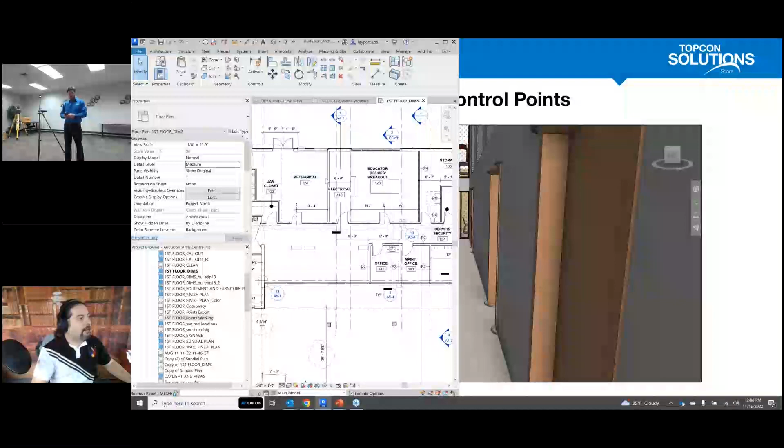Step one, really, it's about setting up your control points, okay? So this process typically happens once you've already laid out your file in Revit. Let's take a look at the Revit file here - you can see we've got a dimensional drawing showing our building itself.

Just to give you a little bit of context, if you've ever seen any presentations I've provided, you may have seen me use this before. This is called the Audubon data set that I typically use for demonstration purposes. This is a real world building, the Grange Insurance Center, the Audubon building outside of Columbus, Ohio. If we have time at the end, I'll show you some of the building itself and compare it to the models - there's some pretty cool photographs we can get out of this real world building.

How do we lay this out in the building? So let's say we've got this floor plan, we want to start laying things out.

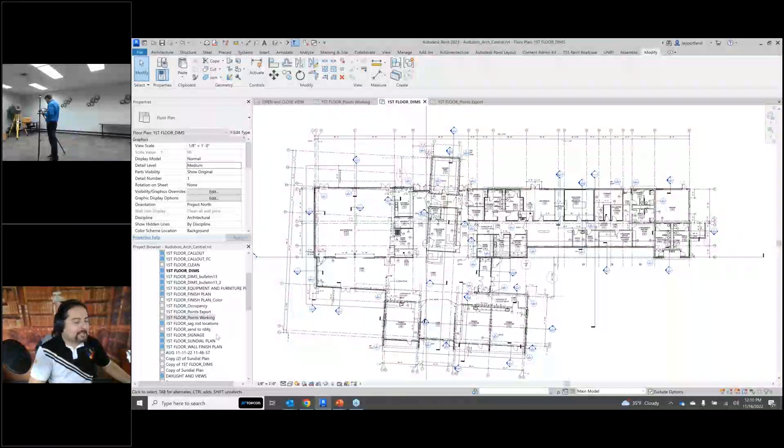So I've made a couple of additional views here. I've called them, and you're going to see those over here in my left panel. I've got one for points that are working and one for exporting.

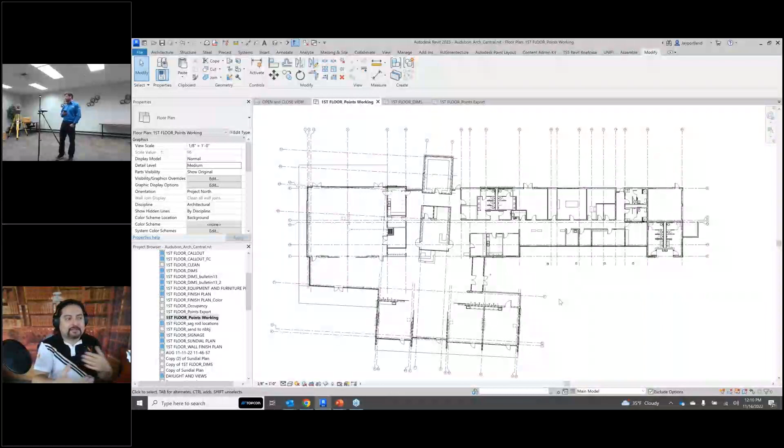So I'm going to go into my points working file, and I'm going to start with something that Mr. Chris Wilson over there can find. We have a couple of points where Chris knows he can go find those, and those are important points. Those are called control points. He can find those in the field, and he can easily go set up a robot and start to make those points. Those points happen to be the grid line intersection, 16 and 16 and a half.

They happen to be 8.5 feet apart, along with grid line D, D as in dog. So those two control points are right here, and I'm going to circle them, those intersections of where these grids intersect. So how does this work?

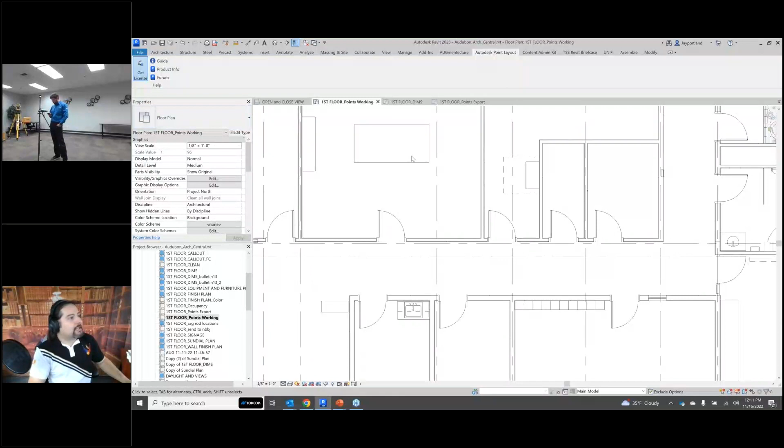With Revit, whether you're using Revit 2019, 2020, 2021, 2022, or 2023, doesn't matter, we've got Autodesk Point Layout. If you launch it for the first time, you're going to have to check out the license. So under Autodesk Point Layout, you'll simply get the license and it'll initiate the full ribbon. Typically we start from left and move on to the right, all the way over to export.

So if I'm trying to get points out to Chris, this is how we'll do it. I'm going to start by marking these two points, 16 and 16 and a half, where it intersects with column line D. How do we do that? Let's go to Point Layout, and here we have control points. I'm going to start by typing in a prefix, control point, CTRL. And I'm going to start with my point number.

Now, Chris and I are used to going back and forth with this. So anytime I'm on the first floor of a building, I start with point number 10,000. That's the point number itself. If I'm on the second floor, I start with point number 20,000. Third floor, 30,000, so on and so forth. So he knows that if he's seeing a point, 10,000, that's the first floor of the building.

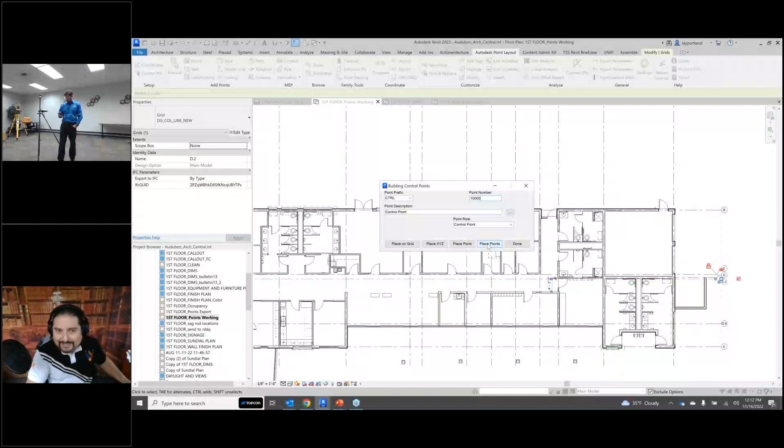A couple things to note: the point description and the point role is a control point. Now let's go, rather than placing a point singular, I'm going to place points plural. This will allow me to select those 2 points, 16 and 16 and a half. Okay, there are my points.

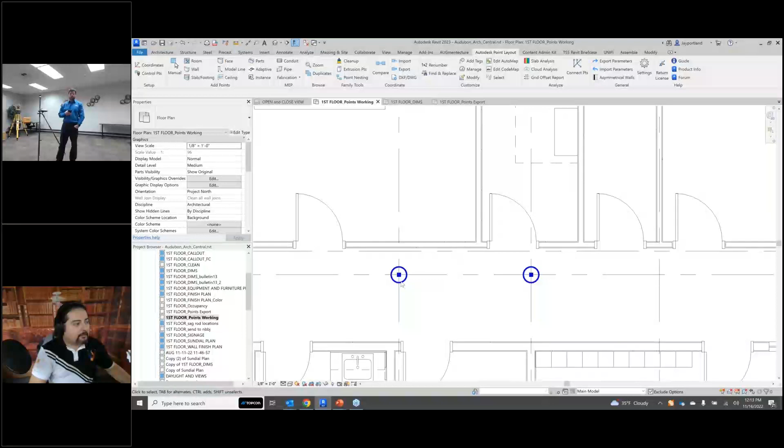Now I've modified the point itself, because the point is a 1-inch cube, 1 inch by 1 inch by 1 inch. That's how big it is. I've modified it so that I can see it in my floor plans. These blue control points, that's what they are, blue control points here, they allow me to establish where Chris is going to go work and base the rest of the points off of.

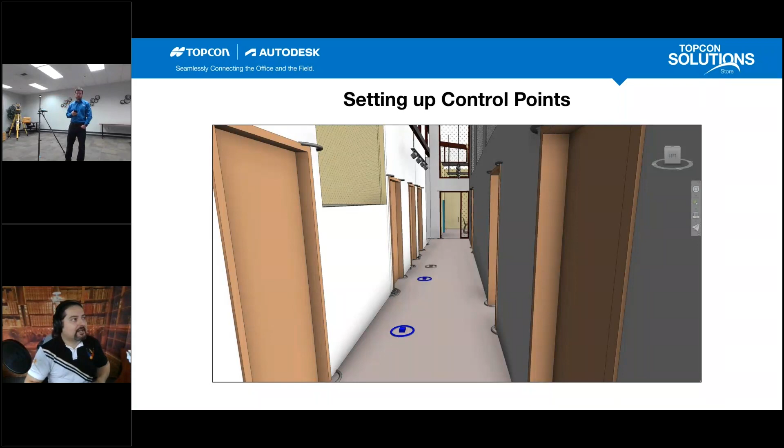Okay, so now that you've seen the control points in blue, the next thing you're going to see is how do we automate the point creation in red. What you're seeing there, we've already laid out the blue control points. We're about to automate those red points.

Now, rather than picking points manually, I'm going to show you a tool that automates that process. This is standard functionality of Autodesk Point Layout. This is the wall family points. So what we do is we tell it what point type, this is a wall, what the prefix is, WL, and I'm going to start again with point number 10,000.

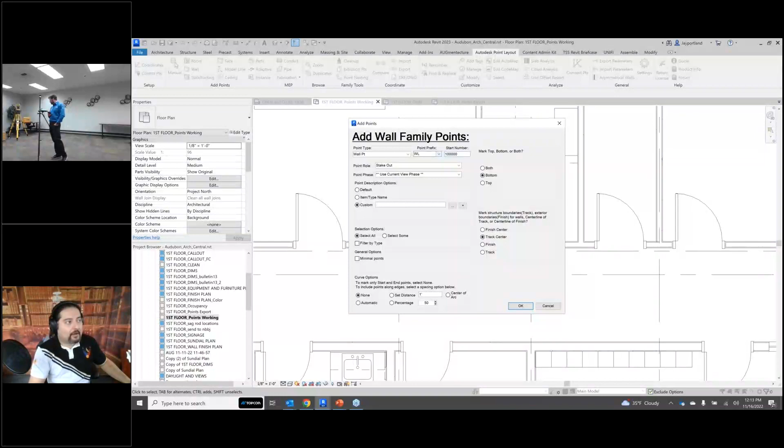So you might be thinking, Jay, you just used point number 10,000. Yeah, but it has a prefix. The other one had CTRL 10,000. These are wall points, WL 10,000.

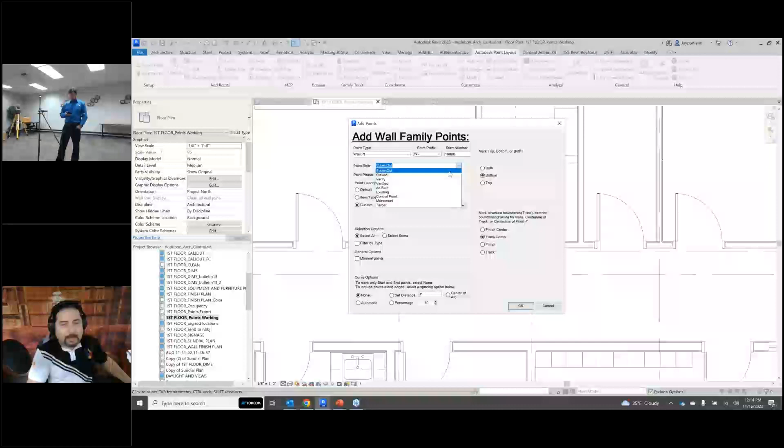Okay, so next, what do we want to do? So we want the point role to stake these out. We have all these options at our disposal, I'm just going to choose stake out. Next, what we want to do is add a custom description to this, and I'm just going to put wall points as the description. This is a code that will be transferred over to what he's going to see in the field. Chris is going to see wall points as the code.

Okay, next, we're going to select all of them as opposed to select some. Think of select some as being able to go select a window. I wish it said select within a window, but it says select some.

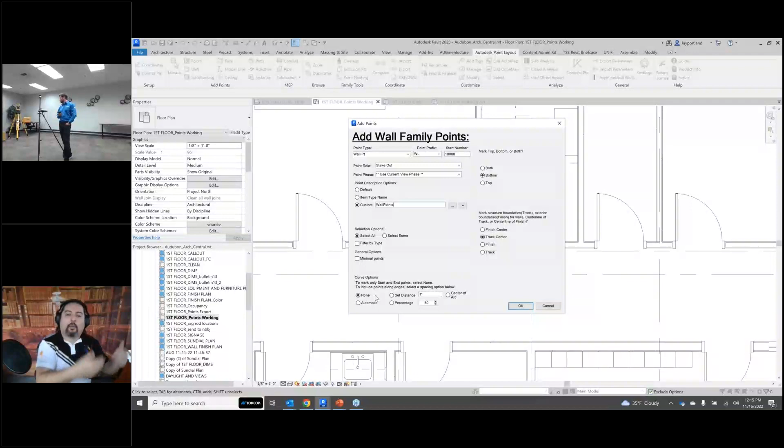I'm going to select all. Next, if I had a curved wall, let's say it was a gentle curved wall, maybe I want a point at every 12 inches along that curvature of the center line, right? So this is where we can say, I just want the ends, or I want to lay points along that curvature. If I hit none, by default it's going to do the start and the ends only, okay?

Now, what do I want to mark? Do I want to mark the top? Do I want to mark the bottom? Or do I want to mark both? Really, I just want the bottom. I don't really care about the top. And then what part of the structure do I want to mark? For this, I want the track center. Remember, with metal stud framework, the track is where we're going to lay the bottom piece where the studs will connect into. Okay, so I want to do the track center.

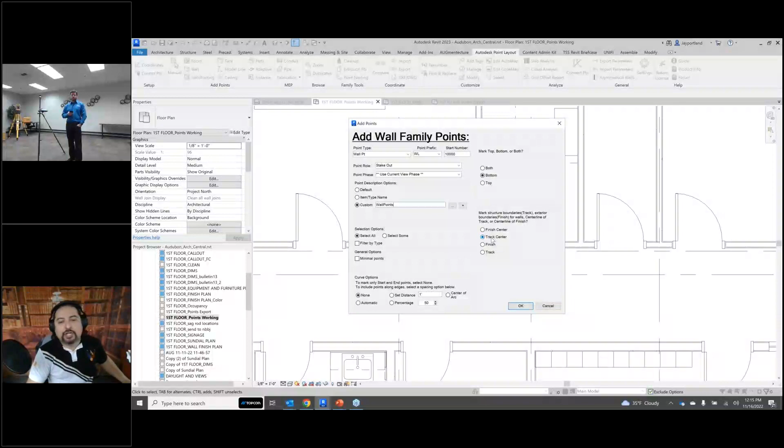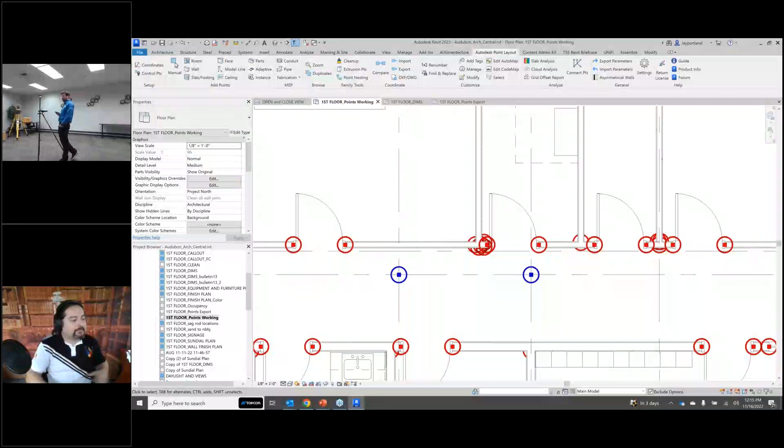And just like that, it's going to take about 20 seconds because this is a rather large file. There are a lot of walls within here. It's going to analyze all of the walls, all of their endpoints, and place a point at each individual endpoint. Doesn't normally take too long, and as you can see here, it took about 15-20 seconds to lay out all of these points. If I zoom out, I can see all of the points that have been laid out already for me. Now I'm zooming back into where our control points are.

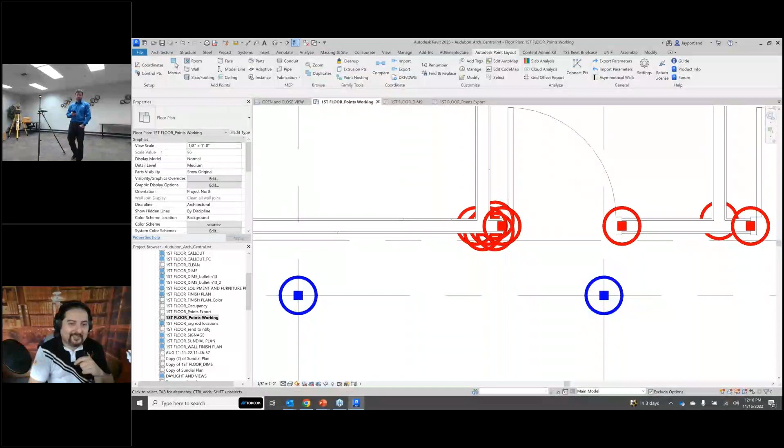Although the tool is very smart and it can take care of all of that, sometimes you get what's known as a point cluster. Chris, was that right? Was it a point cluster that we see? Yeah. So this point cluster, this isn't exactly what we need. So we're going to clean this up. And it's literally as simple as selecting and deleting the unnecessary points. Select that point and delete it. Select the next point and delete it.

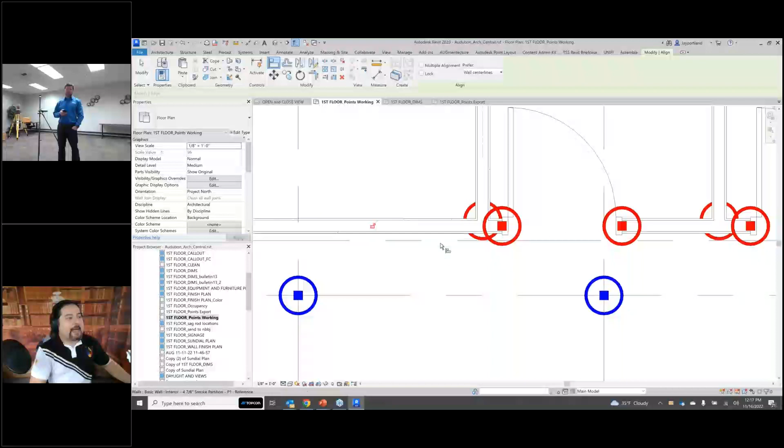Now this point right here, I want that point to be aligned. So I'm just going to use my standard Revit functions that you guys are already familiar with. I'm going to align it not to the outside face of the gypsum, but to the outside face of the structure where the gypsum mounts to, right? So I'm going to grab that and I'm going to grab that point. So there we've aligned these points, and across the hall we can see additional points over here. And we're going to see how Chris goes about laying this stuff out. So guys, it literally is that simple to automate the wall point layout.

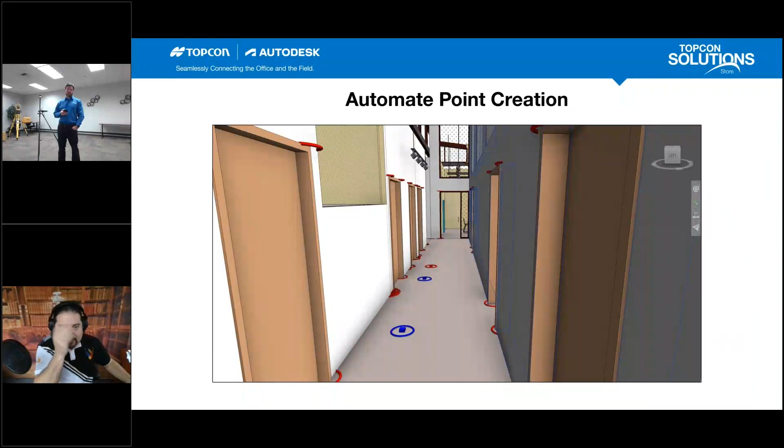All right, let's transition back really quick to our PowerPoint. Automating the point creation, which you just saw. Now let's take a look at exporting these points out to the field. It's a very simple process. And as I mentioned before, I'm going really fast here, guys, but when you work with Autodesk Point Layout, you start from the left in the ribbon and you move yourself over to the right.

Now you saw wall points. We can also do face points, model lines. We can do parts. We can do conduits. We can do pipes. We can do fabrication pipes, parts, hangers. We can do all of that stuff. And then eventually we can export. We want to move to the right. We want to export this information out so that Chris can see it. How do we do this? So simple, export the points.

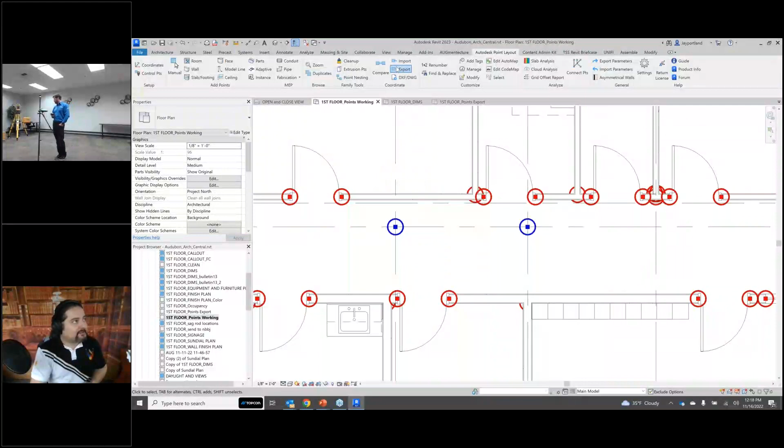We want to start in the upper left-hand corner in this point export order box. Typically, the point export that we want is northing and easting, and that's really user-friendly for people who are in the surveying and layout industry, right? So we can use the northing and easting or the easting and northing. So this is YXZ. Something that we on the Revit side are more familiar with is XYZ. So we're going to use northing and easting. We're going to use decimal feet as the default units.

We will in fact export a DWG out of Revit. This is for the Robotic Total Station. And we're going to check for duplicate numbers, okay? So the point selection, we're going to select all of the points that we just created. The coordinate system, we're just going to use the project, the relative project internal. It's just important that you make sure that every time you export and every time you import, they're the same, okay? And then what is the file export name? So I'm going to call this Audubon SEARUG.

Oh, there we go. There we go. Got it. Okay, Audubon SEARUG. I'm going to place it in my folder, in my dataset folder, and we're also simultaneously making a DWG file and we're making a CSV file, okay? We're doing both in the same thing here. So here's the DWG and here's the CSV, okay?

The CSV is just gonna be a literal data dump of the point number, the description, the X, Y, Z information, okay? Let's go ahead and export this out. It analyzed for duplicate point numbers. There weren't any, so I get that confirmation. I'll hit OK. It made 557 points just off of the automation points and those two control points that I laid out. Let's hit OK here.

Next, it's asking me which view for the floor plan, which view do you want to use? And I have two that are ready to roll. I've got one called points working, which is the view that I'm looking at. And then I have one that's called points exports. It just doesn't display the ring and the cube. So I'm going to use the point exports, and then I want a DWG resulting file here. What coordinate system for the DWG? I'm just going to use the project coordinates.

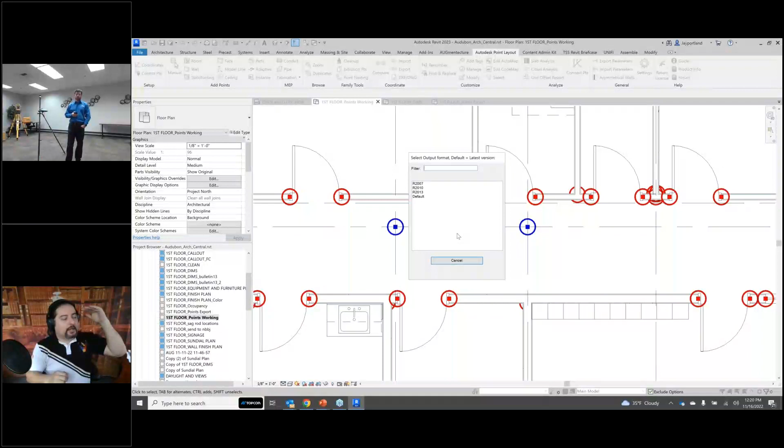And then this is what version of AutoCAD you want to use. You can use version 2007, you can use 2010, 2013, and if you use default, it's just going to use the default version of what I'm currently using. I happen to be using Revit 2023 right now. Okay, so just like that, we have now exported those files. They have been created. And now that you've seen how we export those points, what's our next step here?

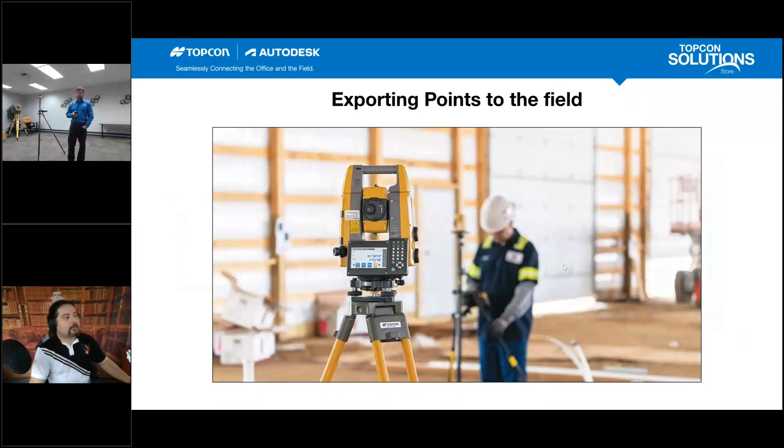Our next step then is to ensure that we get this out to the rest of our system, and we're using Magnet Enterprise. And here to tell you more about Magnet Enterprise is Mr. Chris Wilson. Thanks, Jay. Yeah, Magnet Enterprise is an online web-based application for transferring files from the field to the office. It integrates seamlessly into Magnet Field software and the data collectors.

And it's a great way to get a visual map of your projects that are geo-referenced. You can transfer real-time data. You can also see equipment that is being used in the field live while it's being used in the field. And as of right now, there's currently no file upload limit on it. There's lots of other features and cool things about this web-based application, but those are kind of some of the high points. Thank you, Chris. Excellent.

Good. So I have to put my file somewhere where Chris can reach it, seeing as how he's in Kent. And because this is a live demonstration, let's go ahead and do that now. I'm going to pop open my Magnet Enterprise. It's simple. I'm using Google Chrome. I went to the website and I've signed in. From here, I can see all of my different projects that I have access to. And the project I'm working on right now with Chris is this Audubon project.

I want to place it in the inbox folder here that you can see. I don't have any files in there at the moment, but I'm about to upload those particular files from my desktop here. And I called it the Audubon SEARUG CSV and Audubon SEARUG DWG. Let's go ahead and open those up and upload those files.

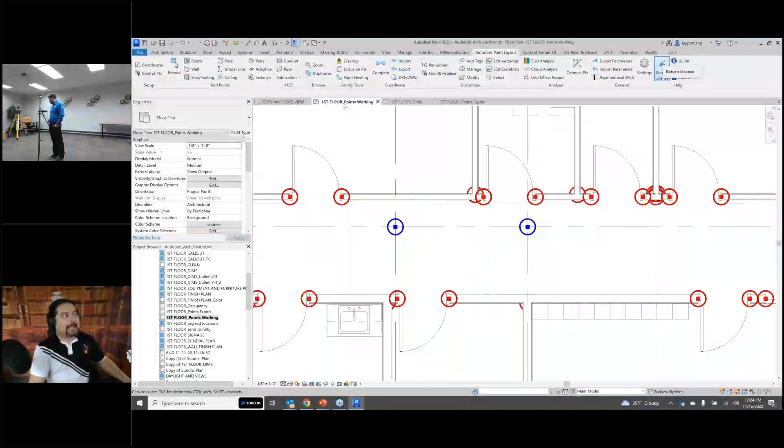In Revit, I have to be signed in as my user account, and when I hit checkout license, it's going to check to see if my account has an APL license. I will double check that for you, and we'll get a clear answer on that. Thank you, Evan.

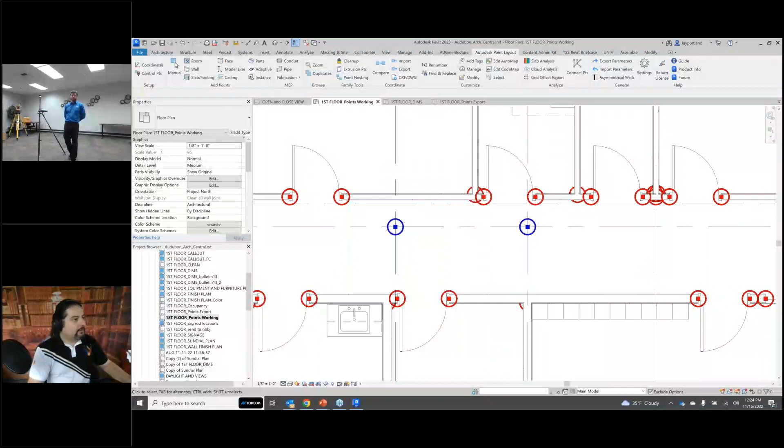Okay, all right. Let me switch back to Enterprise. We have those files uploaded. Excellent. Okay. So that's Magnet Enterprise, guys. That's what we do with Magnet Enterprise. The next thing that you're about to see, and we're going to make Mr. Chris Wilson here presenter. And the next thing you're going to see here is laying out those points in the field. Stand by while we make Chris presenter.

Okay, let's find Chris. There it is, Chris panelist. Okay, let's make him a presenter. Okay, Chris, can you confirm that we can see your screen here in a moment? Yeah, looks good. Should be able to. So hopefully you should see Magnet Field show up. Yes, good, we do. Take it away, Chris. Okay, great.

This is a CSV file with the points. And it's going to ask me, do I want to go ahead and put that right in my job? I'm going to say yes, I do. And I'm giving it a data type. Of course, we want to choose points. And then, sorry, I got a lot of windows. Here we go. And then the format, Topcon text custom, text file or CSV.

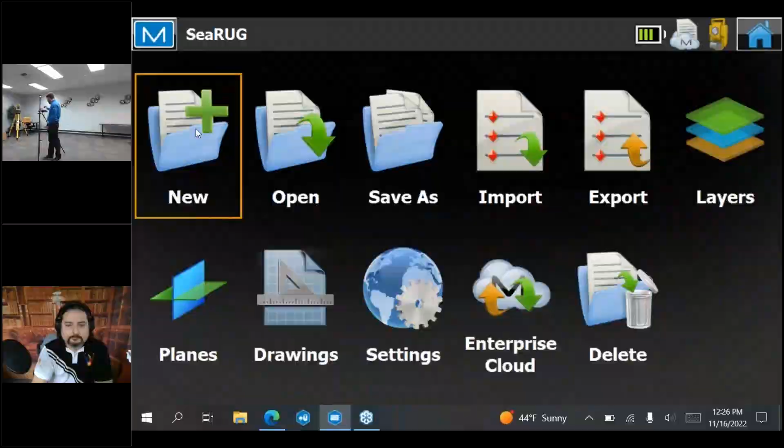This gives you more options of what kind of file you want to bring in and different changes you might want to make so that it reads properly, but we've tested this before, so we know all our settings are good. So it gives you a confirmation 558 points have been imported. Great. I'm going to go back into Enterprise one more time to get that DWG drawing. There it is. And same thing. I'm going to go ahead and download that, bring it right in my job. Multiple. That all looks good. Let's go. And it's loaded.

And one nice thing, I'll stop on this page just to make a quick point, is something that they added into Magnet Field that works even better with AutoCAD. As some of you might know, there's sometimes a lot of layers with AutoCAD drawings. And in Magnet Field, you have the option to go ahead and select used. So on this particular one, there's at least a couple layers that it was able to turn off because there's just nothing on there. And it's just going to fill your data collector up with more layers that you don't necessarily need. So really nice extra feature they added into Magnet Field that works even better with utilizing AutoCAD drawings.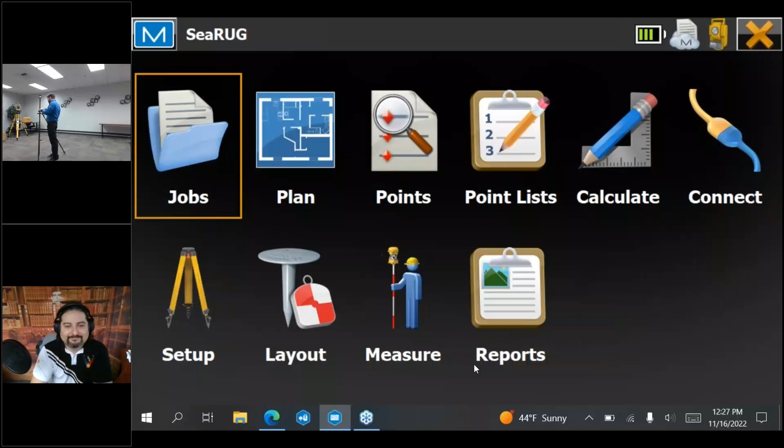All right, so it looks like I have everything in there. And so at this point, I'm already connected to my robotic total station across the room there. And I'm going to go ahead and do a setup routine using those control points that Jay transferred into Magnet Enterprise. So here I'm basically just giving it the parameters for doing the setup. I'm going to tell it to use the first point elevation. I'm using a prism as my measurement file. Now I'm going to tell it which point I want to be able to use for control.

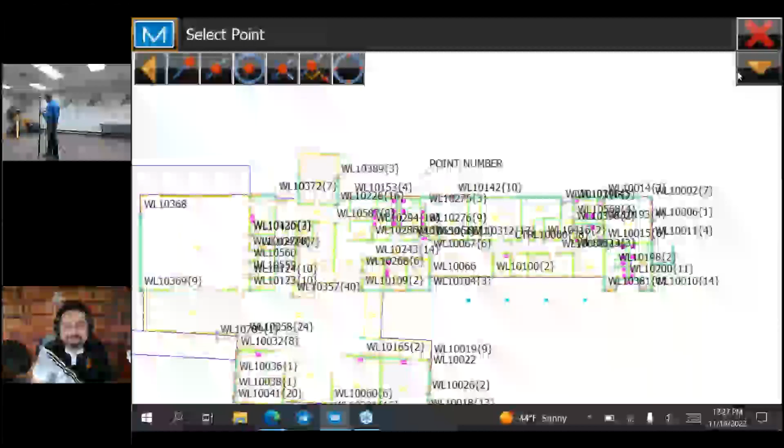I'm going to zoom in a little bit. As you can see, this is the same file, just a little bit different looking when you're in this particular software. Okay, so I've selected my first control point. I'm set up over it already. I have my prism pole here nice and level. I have the offset for my prism pole so that it knows that I'm 5.5 feet from the center of the prism to the tip of the rod and where it's at on the ground. So now I'm going to go ahead and tell the instrument to start tracking this prism. After a brief search.

There we go. All right, so now I'm going to go ahead and take this measurement. Great, now I'm going to go ahead and move to the next one. You'll notice the robot is following me while I'm doing this. Got onto my second control point. I'm going to go ahead and re-level. Select which control point this is.

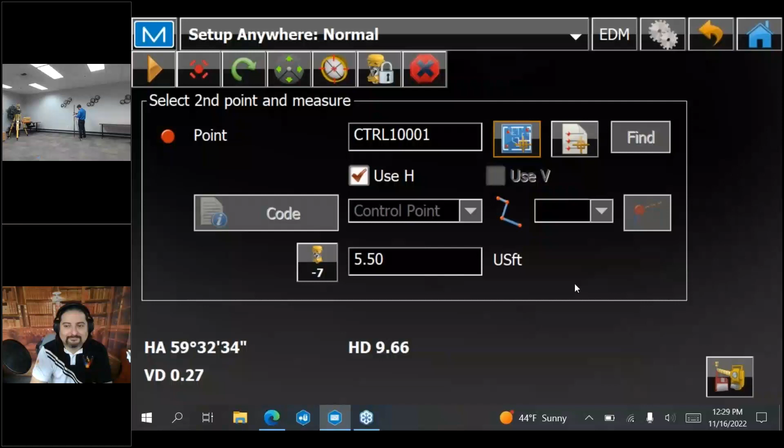I'll take another measurement. Okay, and from here it's going to tell me basically how well the measurements that the instrument was taking fit to the design information I have in the model. So these points and the angles and distances that robot was measuring match up to what's in the model by up to a hundredth. So that's really spot on. That's perfectly good for doing most layout.

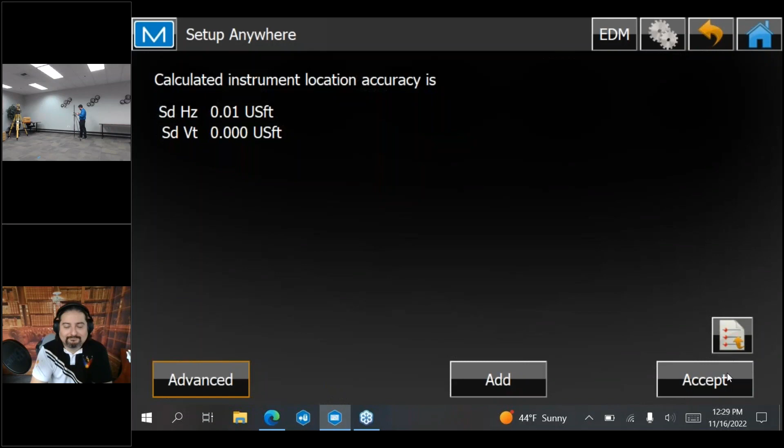I'm going to go ahead and click accept. It's going to bring me back to the home page. I'm going to click on the plan view. And here I can jump right into doing layouts. So some of these layout points that Jay uploaded into Magnet Enterprise. So I'm just going to use this quick select tool here to select some of these wall points. And then I'm going to lay out with a points list.

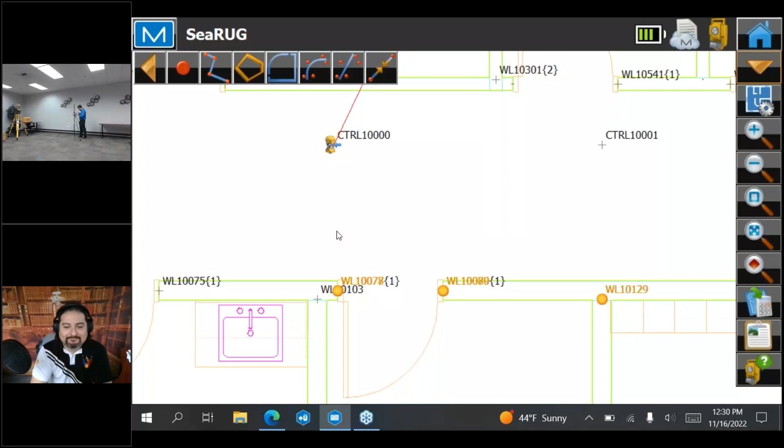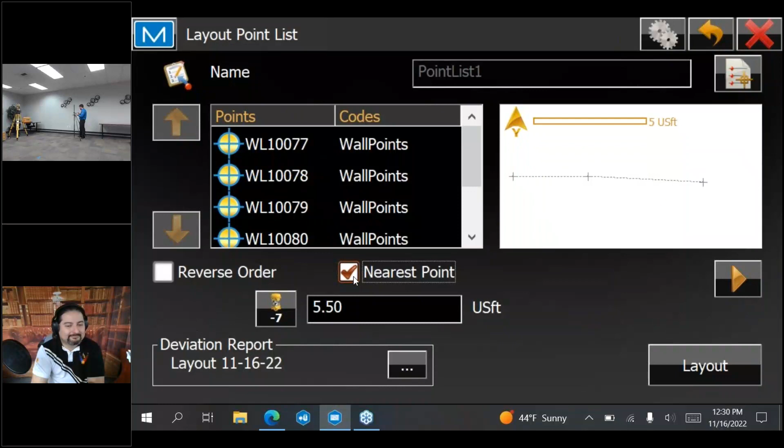Just push and hold on the screen, lay out points list. And I have this really cool option here to select the nearest point. What that is going to do is it's not going to care what the actual number of the point is or what the name of the point is when it's progressing me along while I'm doing layout from point to point. It's just going to tell me this one is closest to you in your points list. Let's lay that one out next. I'm going to go ahead and click on layout.

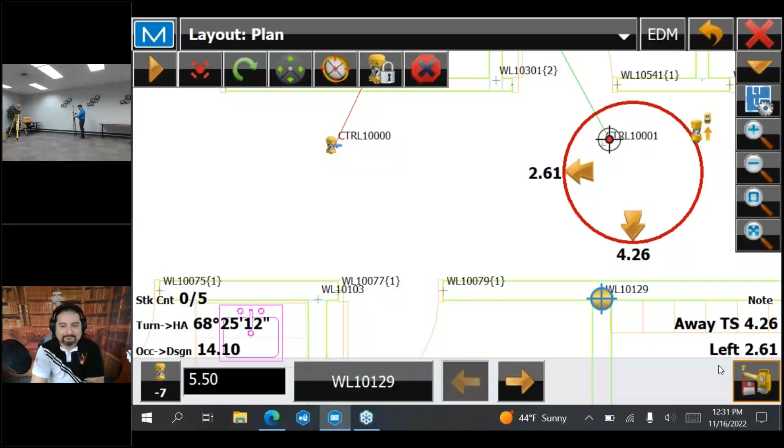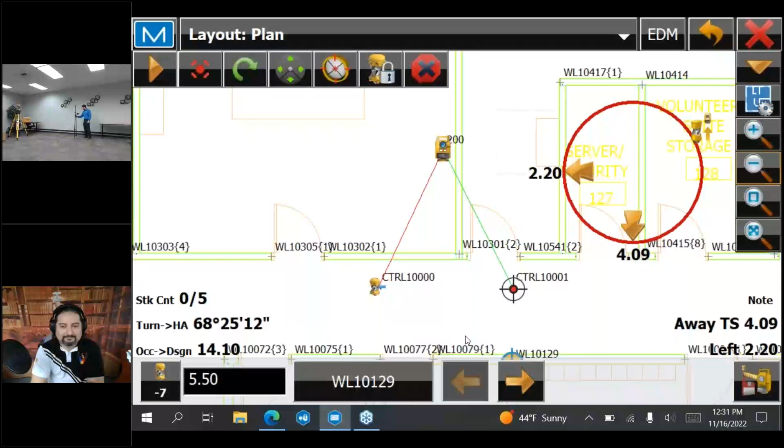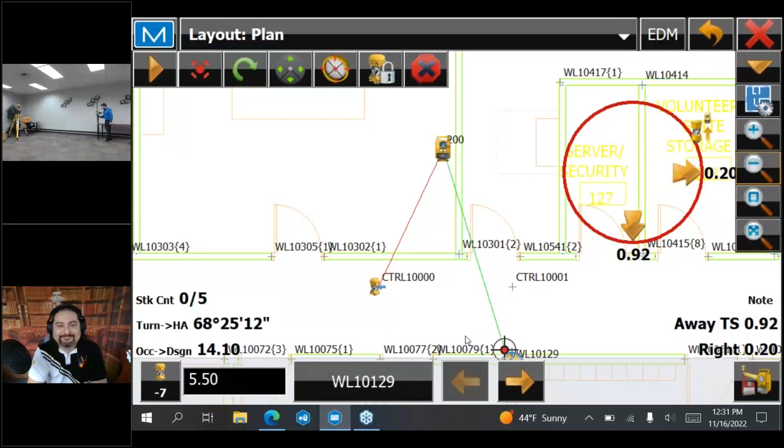And Chris, we're hearing some buzzing and some clicking. Can you help us understand what we're hearing? Oh, yeah. So, for me in a sales position, we like to call that the sound of making money. That's the ultrasonic drive motors of the Robotic Total Station. It makes some very unique sounds, and you grow to love it. It's pretty nice, but it lets you know it's working. Typically on a job site, you have so many other noises that it's not something you even really notice. But that's what that is. It's actually ultrasonic drive motors of the Robotic Total Station.

So in and right. So as I got closer, you might notice on the screen there, it changed my viewpoint, and it brought me in a little bit closer to where the point is, and you can see where I'm at in reference to that point. And it turned green because of the parameters that I currently set. Just kind of helps speed you up. There's a few different things you can do here to do that.

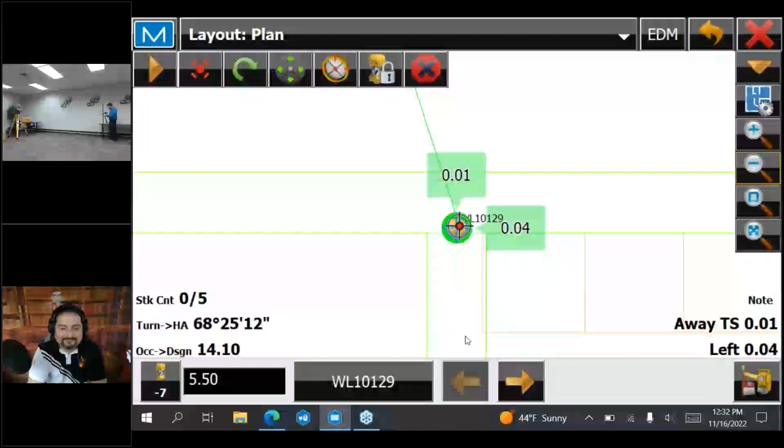So, all right, so it looks like I have to go in and right just a little bit. I'm going to get it just close for the presentation. Perfect. We're in 200ths away from the point. For most things, that's going to be pretty dang good for what we're doing here. So I'm going to go ahead and take this measurement.

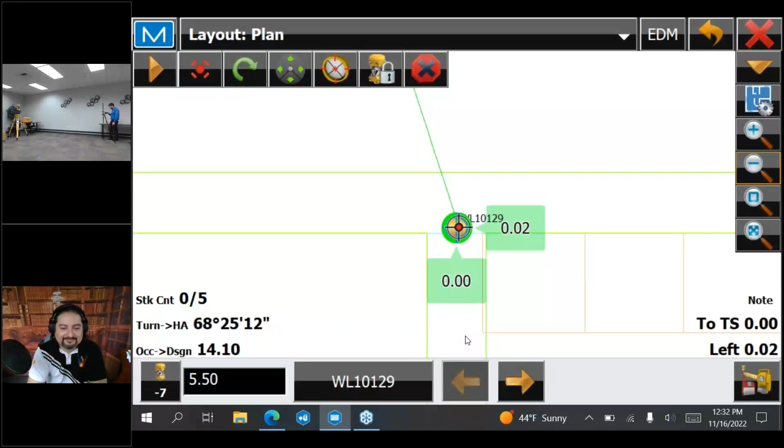And you can see on this screen, it gives you all the parameters of this point that you have currently laid out. It shows you how far off that layout point was. And at the top, I have set an in-tolerance specification, basically. It's just a quick way that you yourself or a manager can look at what layout was done and know right away, is it in your tolerance that you currently set, or is it outside that tolerance?

A couple of other options I'll just go over quickly here. You can attach photos or all kinds of notes to any of the layout points that you do. You can, of course, code it if you'd like, and you can apply it to different layers if you wanted to. So I'm going to go ahead and accept this because I like everything I see. I'm going to hit green check, and it's going to advance me to the next closest point.

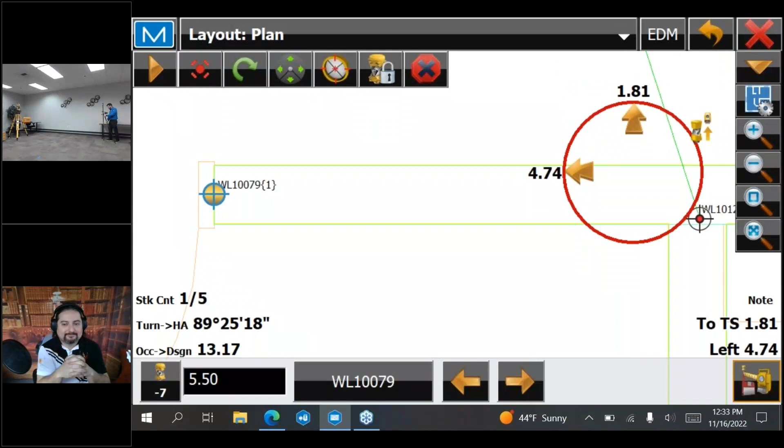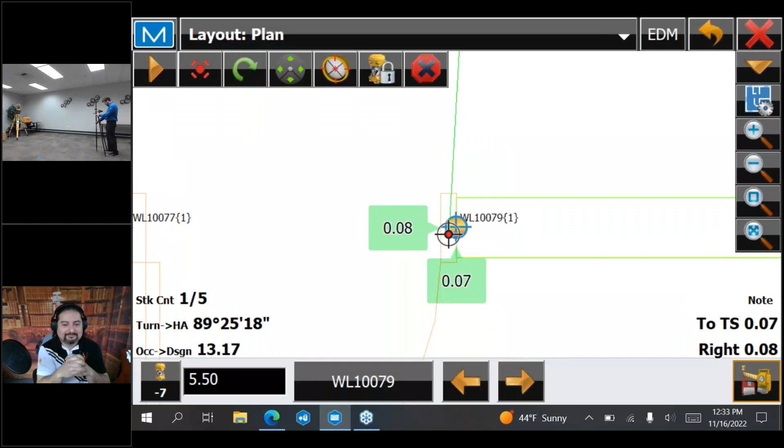I need to go left about 5 feet and up about 1.5 feet. And right there. And so I get close to the point, and then I re-level. About like that. And it looks like I have to go right about 8 hundredths, something like this. So one other thing I'll point out here is, on my screen, you might notice an STK CNT. It's on the left-hand side. It says 1 of 5.

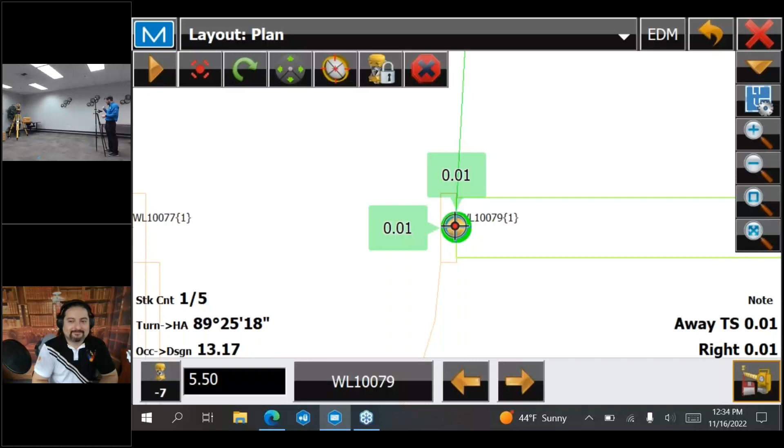That's a nice feature that we have in Magnet Field Layout that basically when you're staking via points list, like what I've done here, it gives you your total points that you need to stake out, so 5. And at this point, we're on number 1. This one I'm about to lay out would actually be number 2. It's a great way to know how much work you have to do and how much you've done so far. So if your boss calls you and says, hey, how much longer do you have? You might have at least a little bit better of a gauge on that with that kind of data.

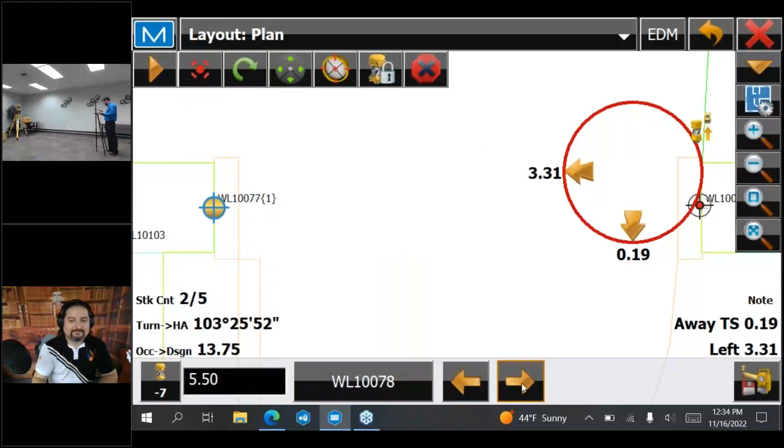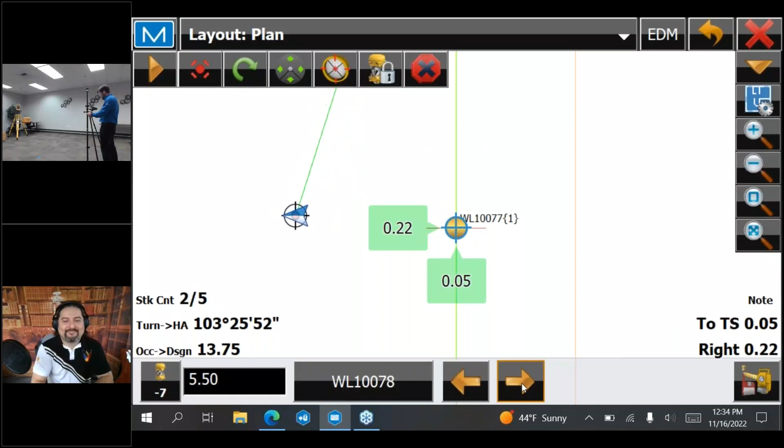So this also looks great. I'm going to go ahead and green check. Going to go to the next point. And here we go. We'll do this last one here. Right, 2, 3. All right. And this one, I'm going to actually go out of tolerance just on purpose, just to show you. So you can see I'm about 2/10, 3/10, something like that off of the point. And basically, I haven't leveled the pole.

So I'm going to go ahead and take this measurement. And it gives you a warning because of the parameters I put into the software. It tells you, warning, basically you haven't laid this point out very well according to your parameters. Do you want to continue storing the point? I'm going to go ahead and click yes. And you can see at the top, in tolerance, no. Just to make it really clear whether something was done to your specifications or not. Just another way to speed you up and also hopefully alleviate any errors. So green check. All right, awesome. And you can see on the left-hand side, my stake count also went up to 3 out of 5.

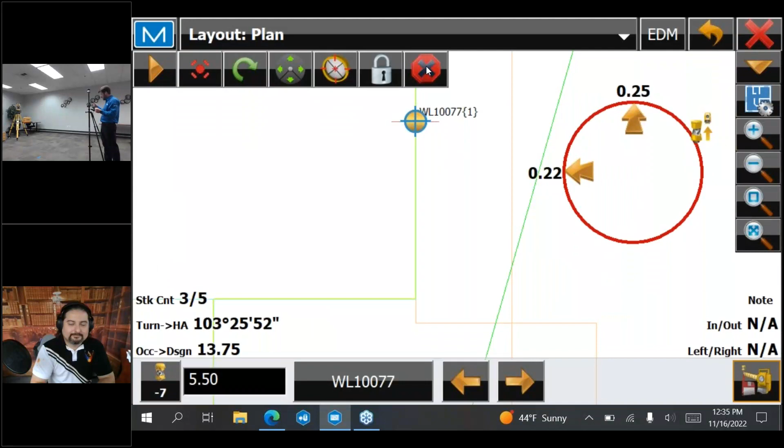From here, I'm going to go ahead and push these points that I laid out back into Enterprise so that Jay in the office can take a look at what I've done. I'm going to go back to the home screen. I'm going to go into jobs in the Enterprise cloud. And from here, I don't have to do anything else other than hit this drop-down menu, upload current job, upload. And looks like it's just about done.

And one great thing is that I just uploaded the complete job. I didn't parse out any sort of information that I did or didn't want to share with Enterprise and get stored in the cloud. I did the whole thing. So that could be photos, reports, all kinds of different data that you can collect and store in Magnet Field. And you can upload it with just one button, just that easy. So I think, Jay, it should be ready for you in Enterprise whenever you're ready. Back to you. Excellent. Thank you.

Chris, I do have one question for you. I get this asked of me a lot, but not being in the layout field myself, maybe you have a better answer. I get asked, what should we expect for layout? Are we talking about 1 minute per point? Are we talking about 5 minutes per? What do we think that's going to take?

That's really going to vary a lot from job to job. The way that varies is, how accurate do you need that point? Can you be within 1/10 of the point and that's acceptable for what you're doing? If that's the case, it's going to be a lot quicker for someone to get within 1/10 than if you need to be completely dead nuts on, or to the 100th of that point. That's going to matter quite a lot.

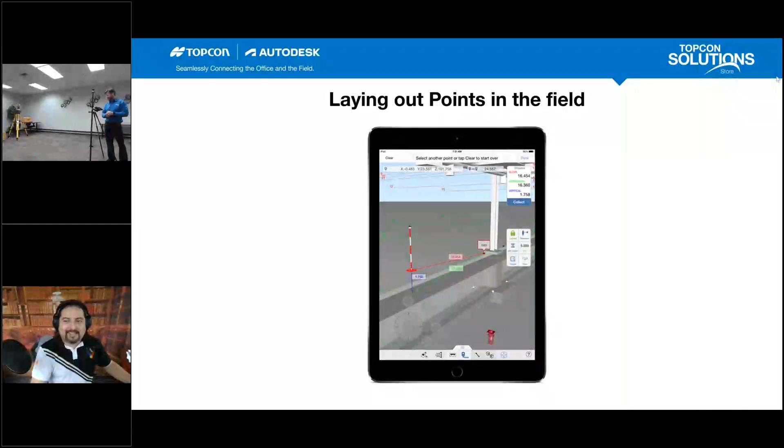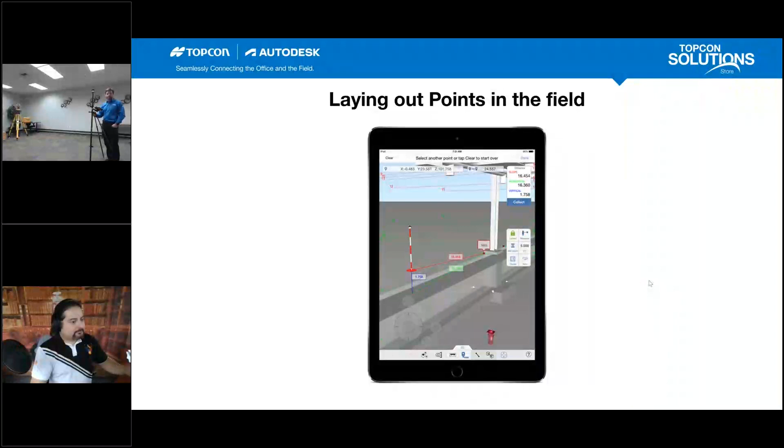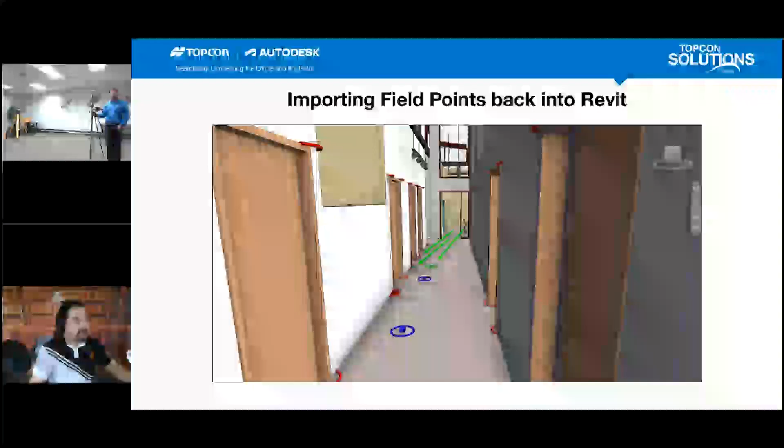Okay, let's switch back over to Revit and let's take a look at how we import those field points that Chris just took care of. In order to do that, I have to go fetch the file. Okay, so here we are back in Enterprise, and allow me to do one quick thing.

I'm just going to refresh my view here and get back into the project. So I'm in Enterprise, and the web URL is enterprise.magnetsystems.com. Here we can see the projects. I'll go to Audubon in the inbox, and this is the file, the SeaRUG.mjf zip file. That's the file that he just finished creating for us. So on the ellipses, I can convert this to a CSV file, which that file type is what we are going to use to help us with that.

Sorry, guys, I'm not sure what happened there. Allow me to refresh one more time. Again, the file type that we want to import back into APL is a CSV file, and that's where we take this converted file and use that as well. I've got a backup file just in case this won't work, but let's go ahead and refresh. Oh, you know what? It's still, oh yeah, data import completed. Okay, stand by. We'll try this one more time and see if we can get that to import.

It's always during the presentation that you have something like this, isn't it, Jay? It is.

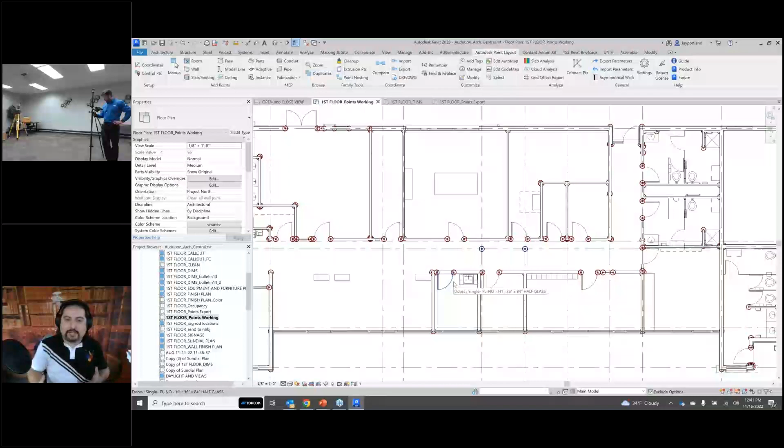Okay, all right, I'm just going to use my alternative file. For some reason it wasn't, maybe it's not done processing like I thought. Okay, the process of importing that file: once we have that CSV downloaded and installed on our PC, we can simply import that. I'll go ahead and select the file to import. And the last one that we did was this test3, okay, and it's a CSV file.

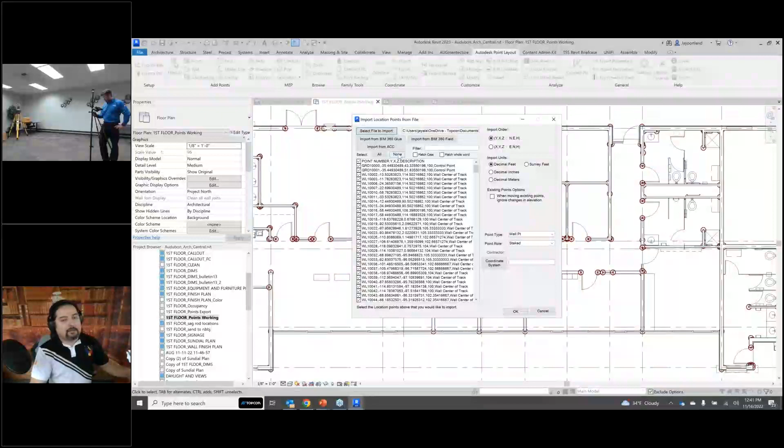It's not very different, and you're going to see the list of all those 580 points that we saw earlier. That's this long list here. The exception here is I don't want to import all of the points. You can see that they're checked. By default, they're always all checked.

I'm just going to go to none. And then at the bottom of the list, you're going to see, let's see, do I have those here? Maybe it wasn't this file. Give me one second, guys. Let's try, that's the one. Sorry, guys, here we go.

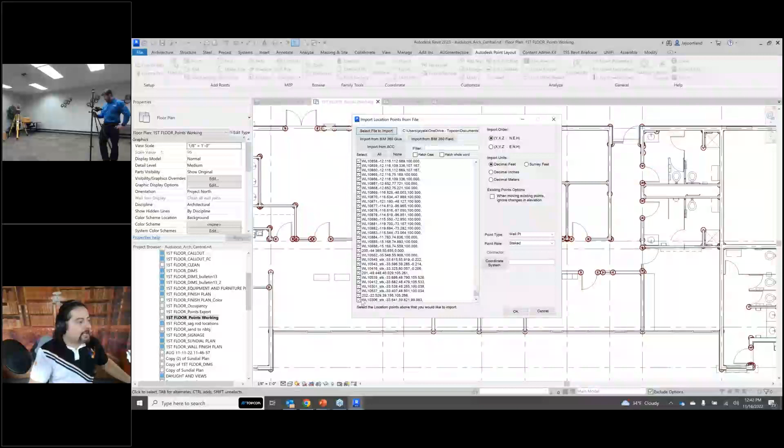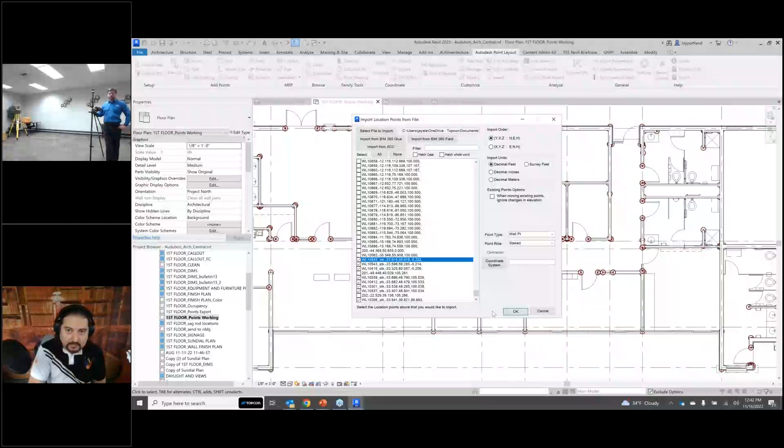At the bottom of the list, you're going to see how Chris's system makes new points, but it uses the old point number and adds an underscore STK. Now that's something that his Robotic Total Station controller does when he's collecting the point. We didn't make a big deal of discussing that, but it's appending underscore STK to the point number that he was laying out, okay?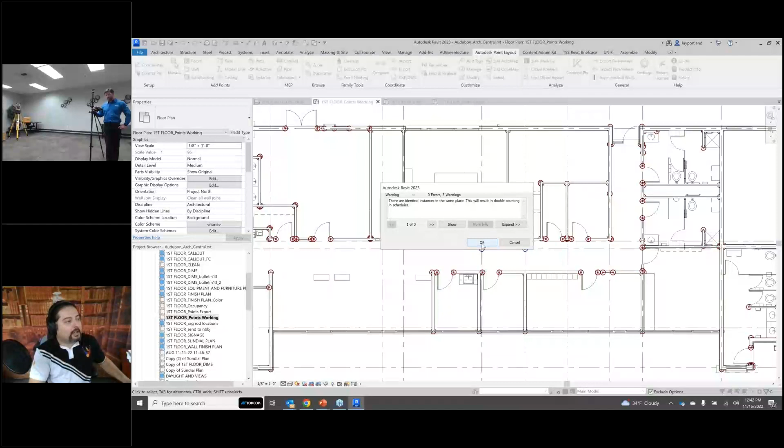So these are wall points. These are going to be staked. Again, they're northing and easting, they're decimal feet. And let's make sure that we're on the same coordinate system, which happens to be project internal. And when we add these points, we give it a role, and it's going to show where those points are specifically related to the points that he created, right?

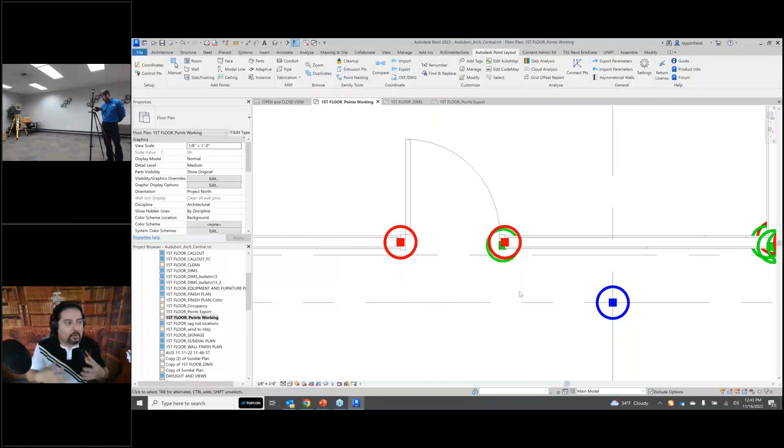So here we've got the points that were made. Oh, and incidentally, check this out. We've got it showing up in green here. I didn't get into this, but this is controlled by a standard Revit filter. If you guys want to see how I did that, please chime in the Q&A. If not, if you already understand Revit filters, we'll leave it at that.

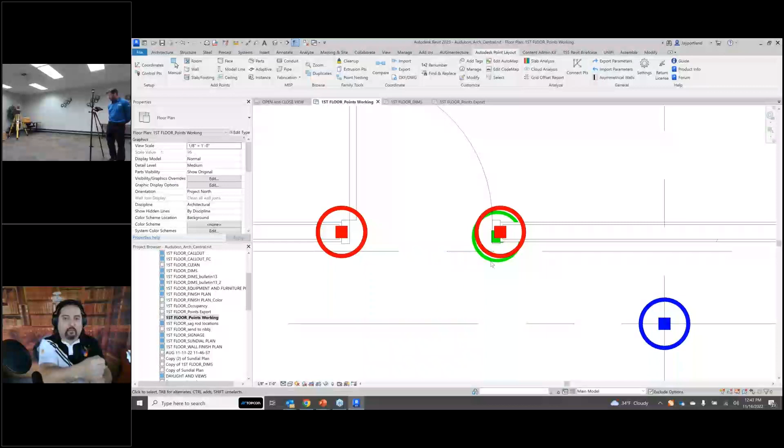Here we can see this particular point and that point, I'm showing them both. You can see where the green one was laid out as opposed to where we had thought it was going to be. So this is where Chris, maybe for some reason, couldn't put it right where he needed it. Maybe there was an obstruction of some sort, maybe a hole there. I don't know what the reason would be, but we've got some kind of deviation here.

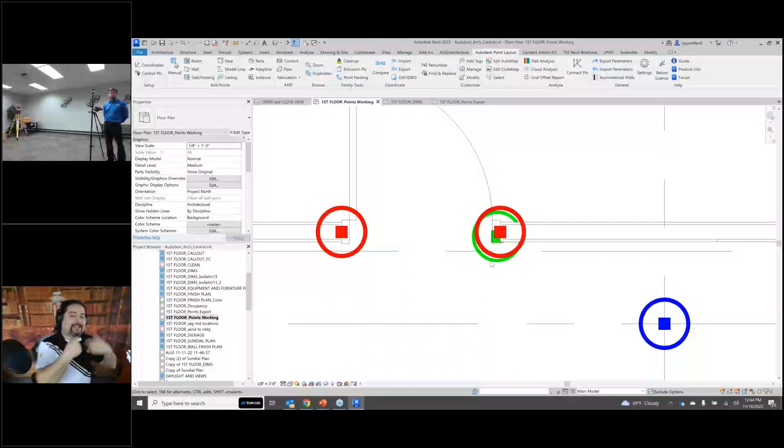This is really the power of being able to send those points out to the field and have Chris check against tolerance, and it would say yes or no. This is where that kind of thing comes in really handy, and we can check for those things directly within the Revit environment. So we can see where he's laid out the points, and we can bring those points back into our project.

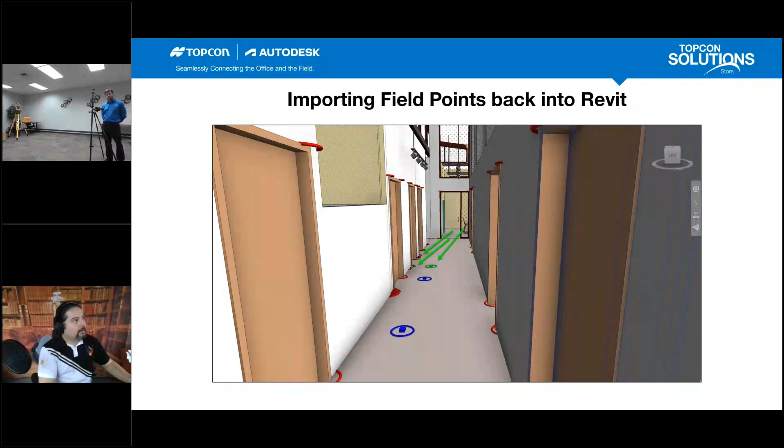Okay, so here's what we saw today. This kind of wraps up the technical part of what we wanted to present. If you guys wanted to see that Revit filter stuff, please fire that into the Q&A.

We're gonna end here in about 3 minutes, but if you want, we're gonna continue and show you not just the Audubon data set, the Revit file that we have, but the real world photographs of that particular building and how accurate they got to the design. So stick around if you want to see some of that. It's pretty nice eye candy for those who want to see that.

Okay, so in recap, what did we show you guys today in the 45 minutes that we've been presenting here? First, setting up the control points. We could also do state plane coordinates if that's something you're interested in. We can do another web demo on that.

Also, we showed you how to automate the point creation using the walls. We automated that and didn't have to go point by point by point. Third, we saw how to export those points out to the field and get that prepared for Chris, or someone like Chris, who's out doing the layout.

We showed you additionally Magnet Enterprise, which is the Topcon cloud that works directly with the Robotic Total Station controller. And number five, we saw laying out those points in the field, how the Robotic Total Station tracks the prism, and some of the art that Chris has to do with leveling and getting over there and speeding up his process.

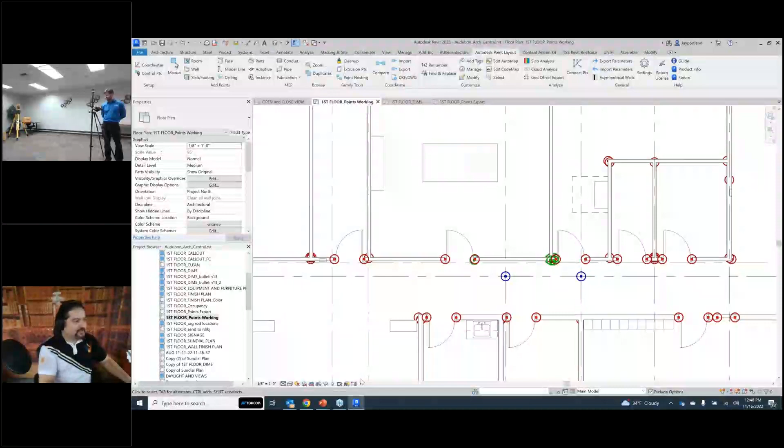Excellent. Okay, and for those of you sticking around, I did want to show just a little bit more. Chris, thank you so much for helping us out with that part of it. Check this out, Chris, if you haven't seen it already.

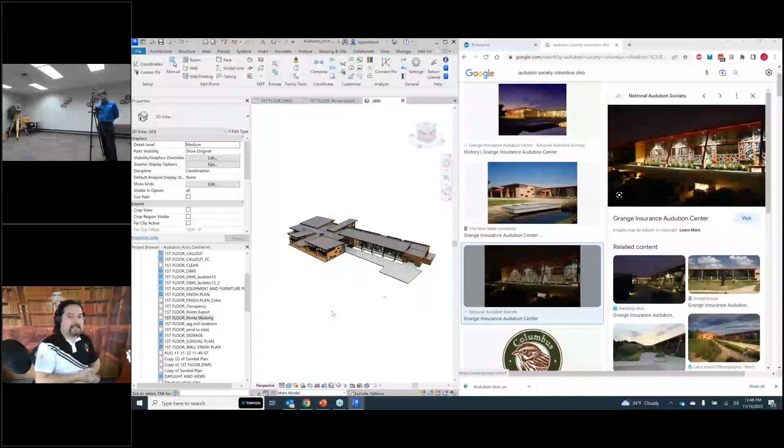So this is a Revit file, Chris, that we got from one of our clients during my Autodesk days when I was working there. They were kind enough to provide us the Revit files for the architecture, the structure, and the MEP. We used this data set back in 2012 to help people understand what was new in Revit. However, that building was actually constructed the very following year, called the Grange Insurance Audubon Center, just outside of Columbus, Ohio. These are real world photographs of that building.

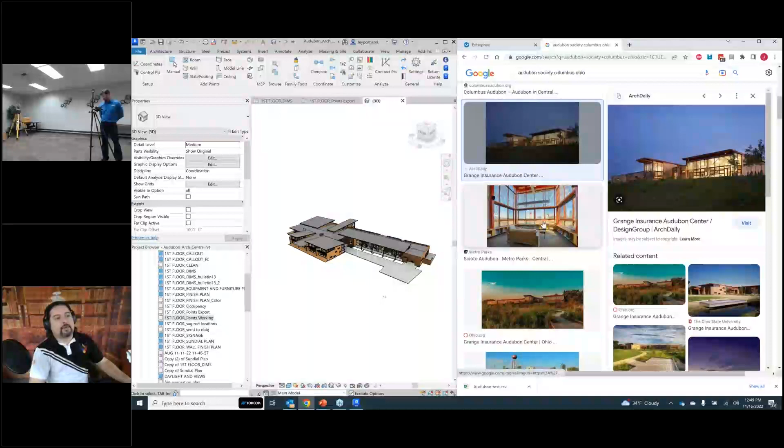Guys, there is so much in here. For example, check this out. We've got this particular view of this particular room. That room is this room over here. Let me rotate around and show you where that's at. That's this room right here. And to give you a real world sense of where that's at, check this out, Chris.

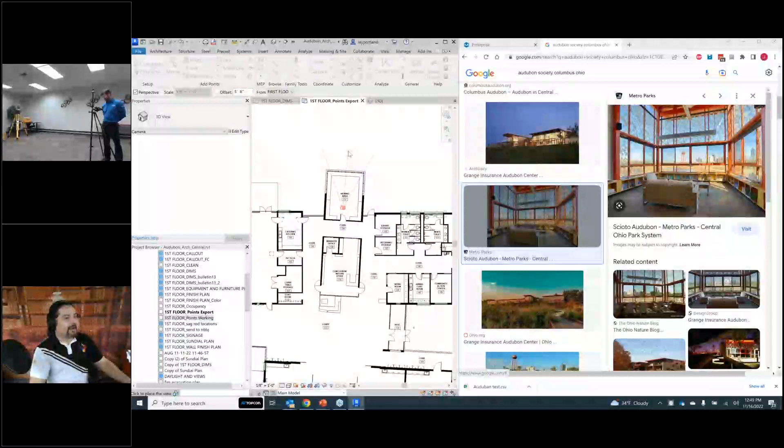I can zoom out and place a camera view. Now you're not going to get the pretty landscape in the background, cityscape in the background, but what you will get is the image here. Let me change that to consistent colors, and I can broaden that wider here and make it taller, right? Check this out - that's that same view from within that building. And if I was clever enough, I could probably rotate and elevate and look just in a slightly different way to get that same image out of there.

It's a beautiful building. We see lots of receptions get booked there for weddings and stuff like that. And I wanted to make sure that the customers that we demonstrate the real world, going from a Revit model to points and laying that stuff out.

This is the result. This is the result of all that, Chris. We were able to get the walls, the tracks laid out right where they're supposed to be. And with enough time, of course, the specialty contractors will come in and lay out the walls, put in the windows, and do all the work that they need to.

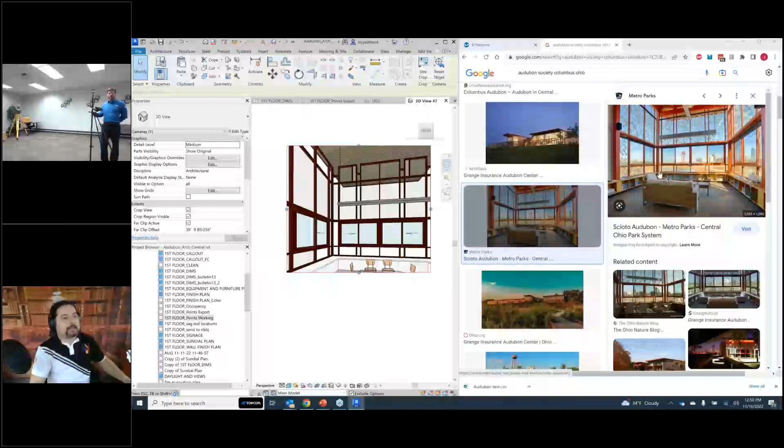But it all starts with Revit, the design software, and that's where SeaRUG comes in, right? That's where our main clients are, that we wind up catering to, helping them understand this is the concept of what we're going to design, and then ultimately the real world contractors - this is what they build, the GCs, their specialty subpartners, and all of that, right?

So there's a middle place in between, and that's where APL and Topcon's robotic total stations can really come into play. I just love the fact that we're able to straddle the fence on both of those sides, which is being able to support our clients with the software, but then also being able to support them with the hardware.